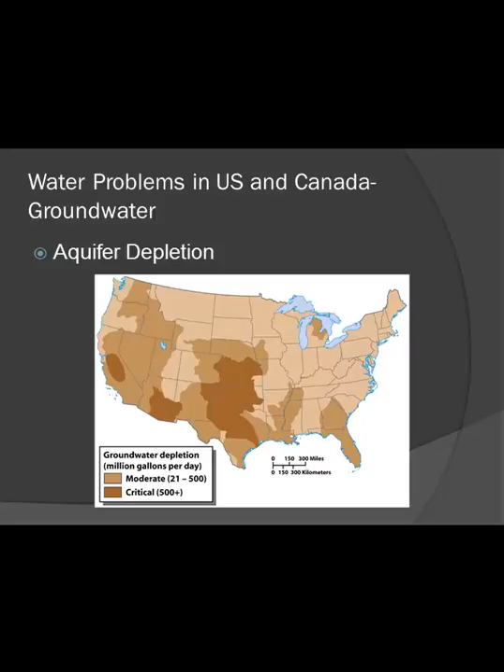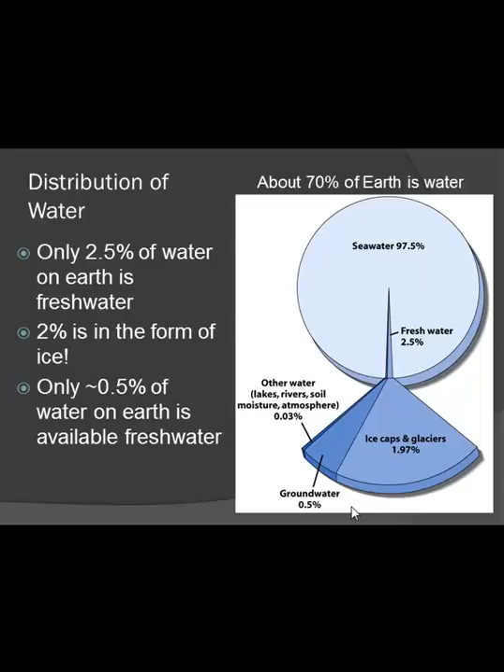We have to be careful in how we use our water. So there is enough water, as this first bullet shows, but it's not evenly distributed, and we don't manage the runoff of our water carefully enough to preserve it or conserve it.

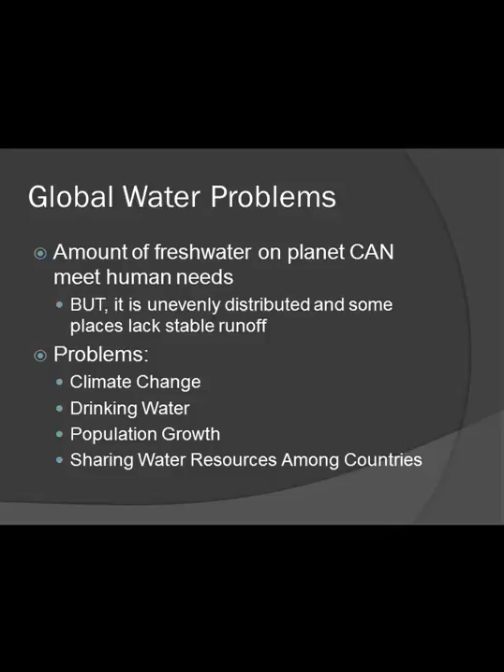Some of the major problems that have to do with why we have freshwater problems are climate change. Drinking water is a problem that we have to limit the contamination of, population growth, and being friendly with each other in sharing our water, not just among countries, but also from state to state.

You do need to understand that climate change is impacting the amount of water available for us, the amount of fresh water available to us, and the amount of fresh water that is not contaminated. So some of the issues are with climate change.

If you're ever asked, how does climate change impact water and water availability for human use? Well, you could say that climate change can actually reduce the amount of snowfall. If we have less snowfall, we have less runoff going into our streams, so we have less stream water - that's our surface water that we still use for drinking in many places.

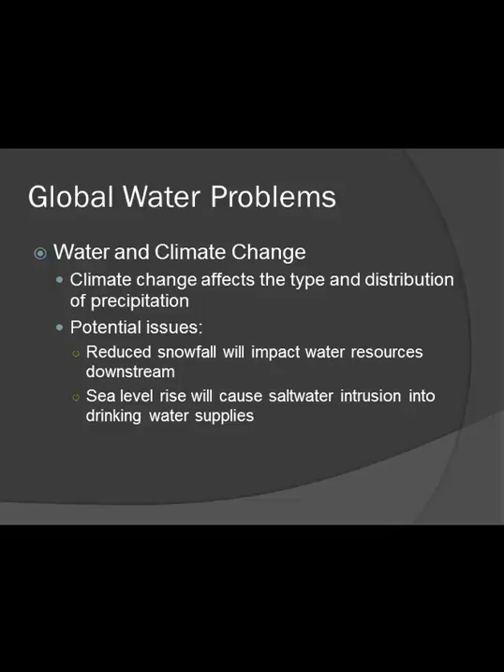Also, as a result of climate change, the sea level could rise. If we have more sea water, that's more salt water, that's more pressure, and more of a potential saltwater intrusion for all the groundwater supplies along coastlines.

Other drinking water problems that seriously need to be considered is that developing countries do not have safe drinking water, or they don't have access to water and they have to travel very far just to get it. And when they do, it's not much and it's contaminated to the point where it can make them very sick and kill them. Many thousands of people a year die from drinking water contamination.

Also, our population is growing worldwide and especially growing in developing countries. And this increased population means that they need more safe, fresh water.

We also use, as you know from the last slideshow, a ton of our water for agriculture. We need to think about how we're using water for agriculture and practice more sustainable agricultural methods.

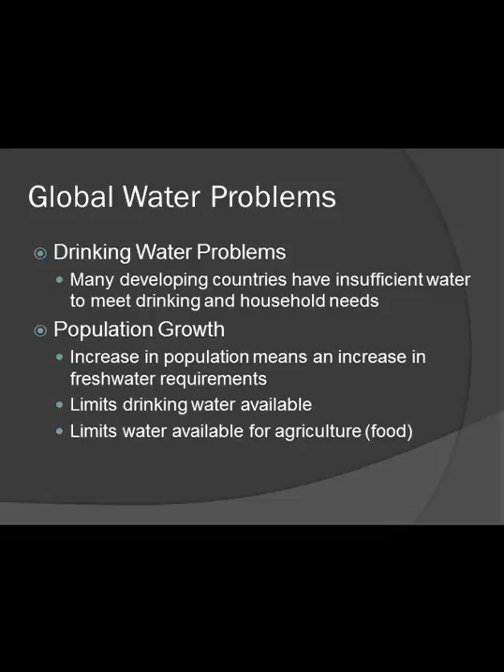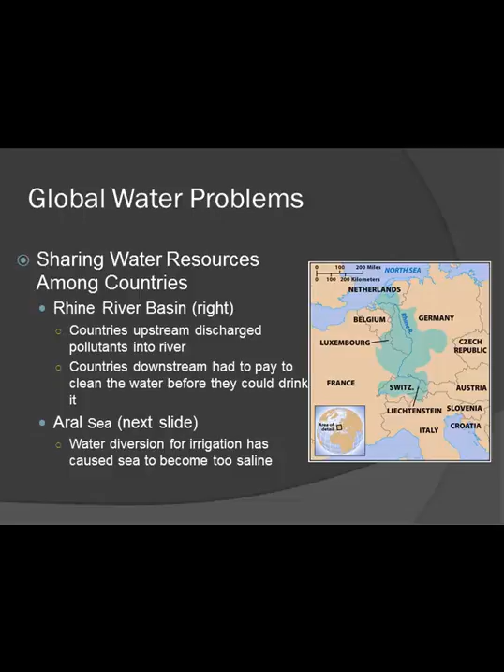Other examples of countries that just irritate each other because of their shared water are around the Aral Sea, and we'll look at that on the next slide. That's because they have diverted the water for irrigation, and it's caused the sea to become salty, as we'll see in a couple slides.

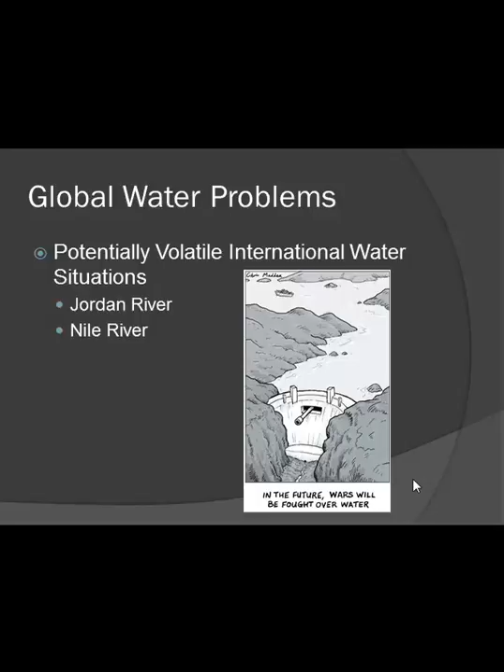We also have water wars just because we're building dams. By building dams, whoever's downstream of what was once a big flowing river is now impacted by less water downstream. So when we think about what we can do to conserve our water, we also need to think about not just conservation, but management of the water that we do have.

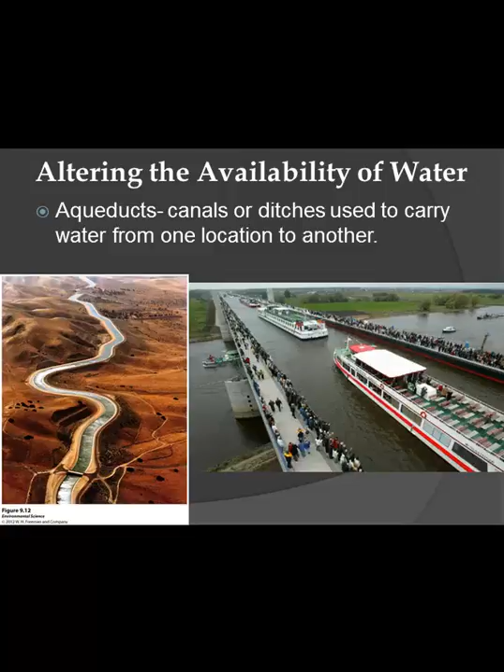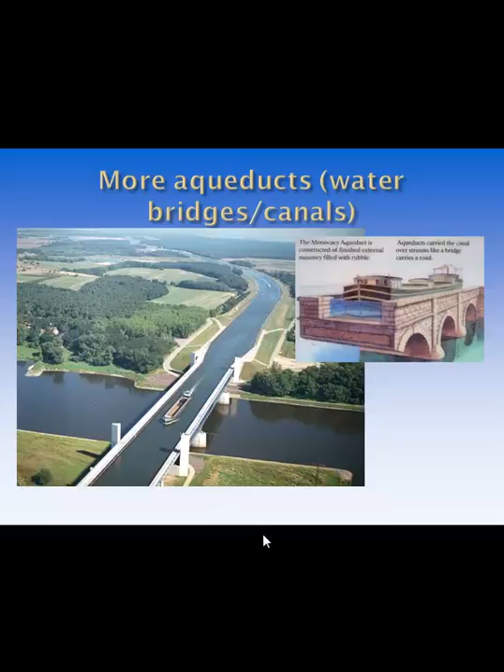Sometimes our aqueducts are also used for transportation. Not only do they transport water, but they also carry cargo, or in that case, just ships. This is just another example of an aqueduct - it looks like a road, and it just looks like, oh, isn't that a nice little river? But it's been constructed in order to bring fresh water from one location to another. These have been used for a very, very long time.

You also need to know what a dike is. It's very similar to a levee - kind of like a wall that holds back water from pouring in from a larger body of water. Dikes are built to prevent ocean waters from flooding into adjacent land.

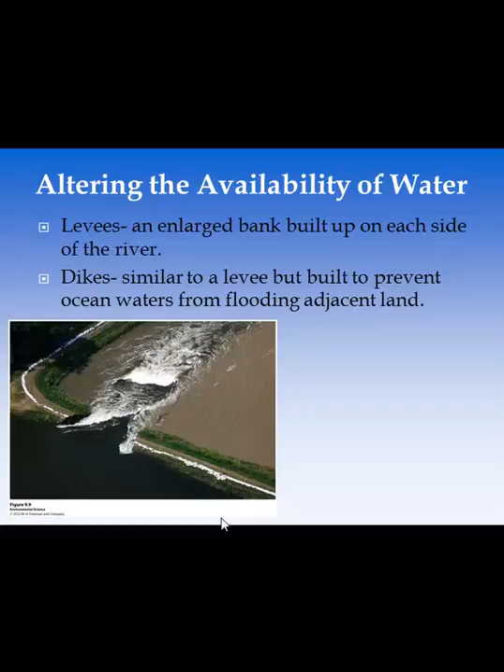What you're looking at here is California. California receives a lot of its water from diverting water from other locations. If you look at the picture and see what's in blue, you'll see lakes labeled in blue, as well as aqueducts, which are the transportation lines for the water to go from one large water location, such as a river or lake, to a place that's more highly populated.

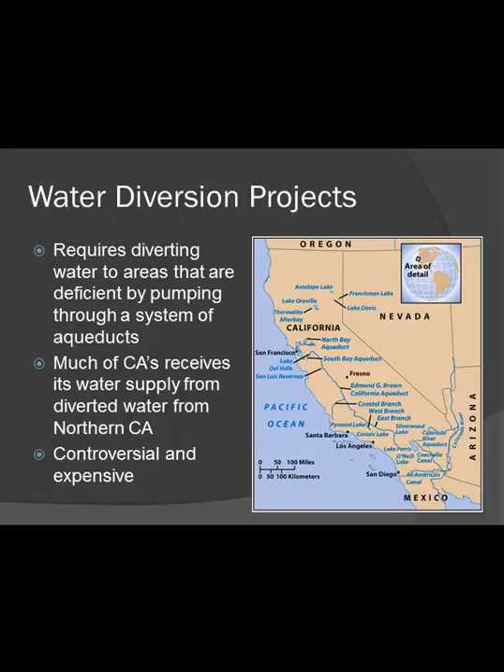These are really controversial, because moving water from one location to another and diverting it the way you see fit impacts the other people who lived along that waterway and used it naturally before it was diverted. This creates something we call water wars. And it's really expensive, by the way, to divert water. Okay, back to the Aral Sea.

The Aral Sea at one point was the world's 4th largest freshwater lake. Let's go back and take a look at what this picture is trying to show us. This is a consequence of water diversion, which can have devastating impacts downstream, as I told you before in the other pictures.

The Aral Sea borders a couple of different countries, and as the world's 4th largest lake, it was a great resource for many people for fresh water. Since the two rivers that fed the lake were diverted to go to bigger cities, the lake's surface area was dramatically affected.

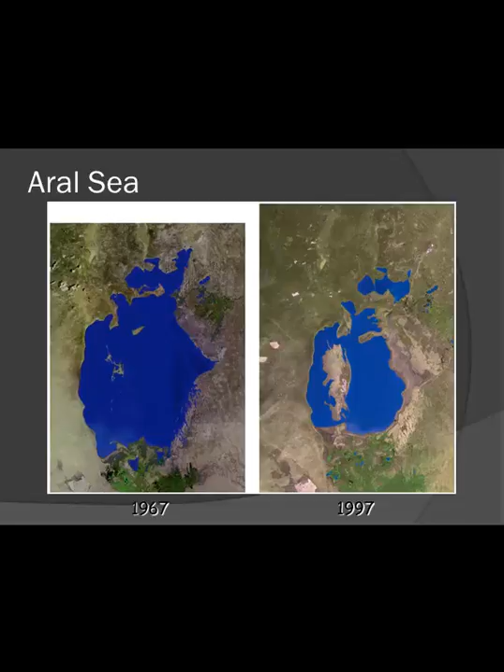The surface area declined by 60%. You can tell by looking at the pictures how much less surface area there is. The lake has become split into two parts now - the North and South Aral Sea.

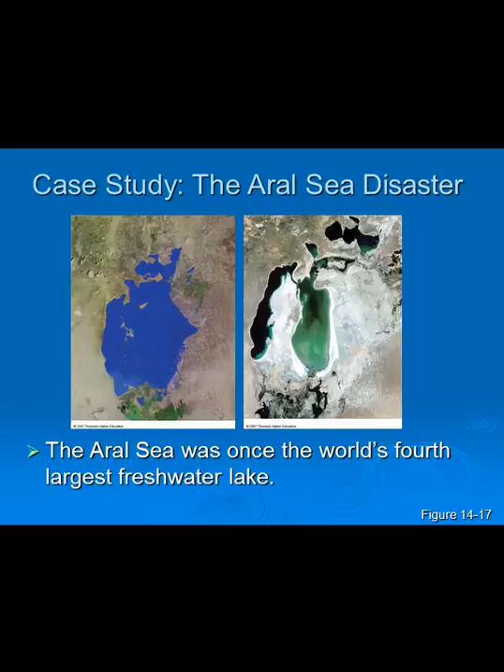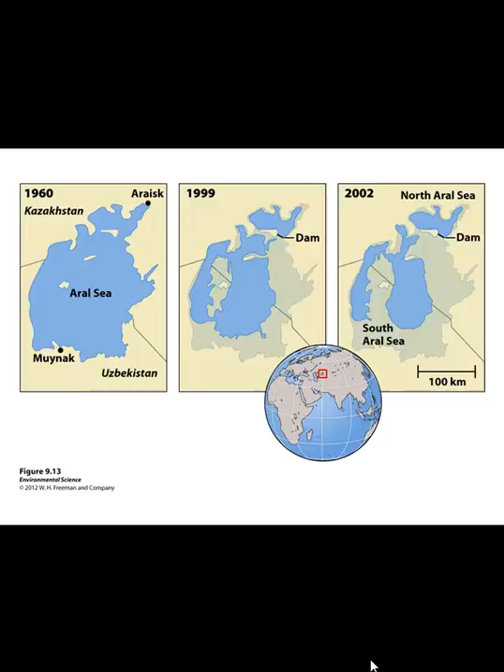Here's another picture showing that change in the surface area of the lake, and now you see our two seas. Here it is with some nice labels for you to understand how much surface area we lost because people were getting greedy by diverting the water and abusing the amount of water they used.

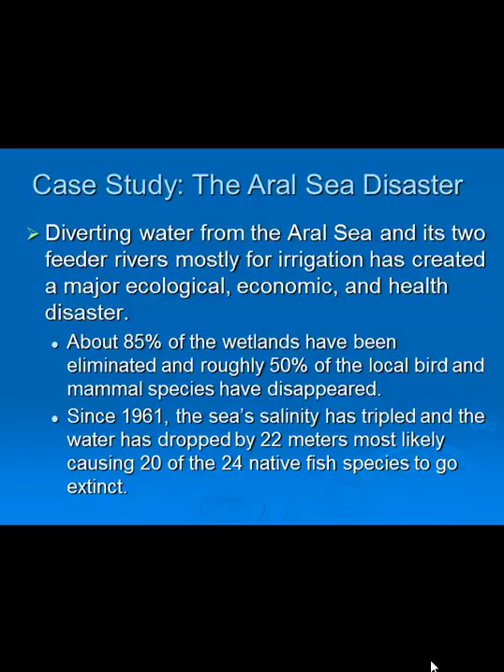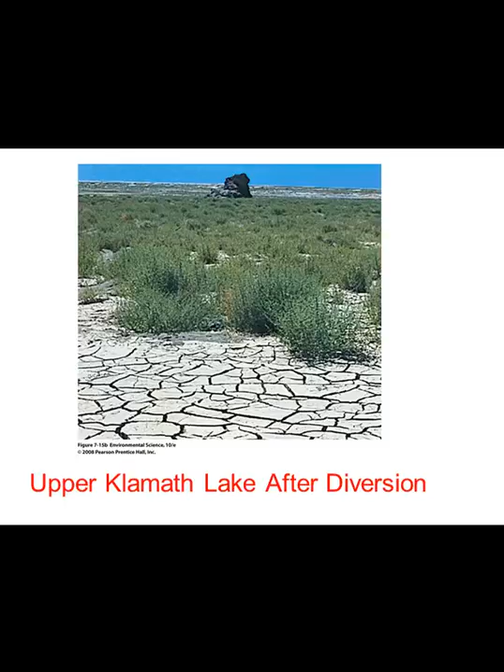So we know about some of the issues with water diversion. What are the other things that we do to alter our water resources? We build dams and we make reservoirs.

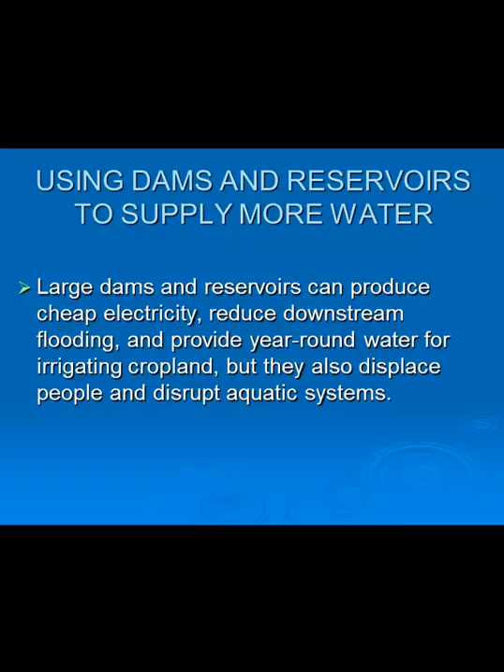We build dams because we need them - for electricity, to reduce flooding downstream somewhere, and for agriculture, irrigation, and for supplying drinking water to us. We disrupt these systems that were once natural.

In the United States, we have well over 80,000 hydroelectric dams. You guys are most familiar with a really common one around here, and that's the Conowingo Dam. It's on the Susquehanna River, and that is our hydroelectric dam. Many of these dams are not really safe to use anymore, and they've been recommended to be decommissioned.

Some of the benefits of a dam are to generate electricity. The water behind the dam can be used as a reservoir for recreational activities like boating, fishing, and swimming, and this is common behind dams. This also regulates how much water is flowing downstream, especially in the spring when the snow melts everywhere.

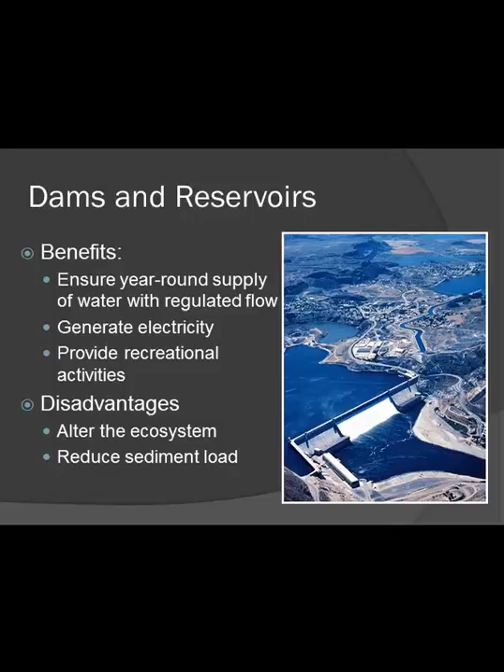But there are definitely disadvantages to ecosystems. The fish can't swim all the way upstream. We don't have as much sediment that carries the nutrients where it belongs, so we have a reduction in our sediment load. So we have benefits and we have disadvantages.

The reservoir will be behind the dam - that's what's holding the water. We'll learn later about what a dam looks like in detail for hydroelectric power use really soon.

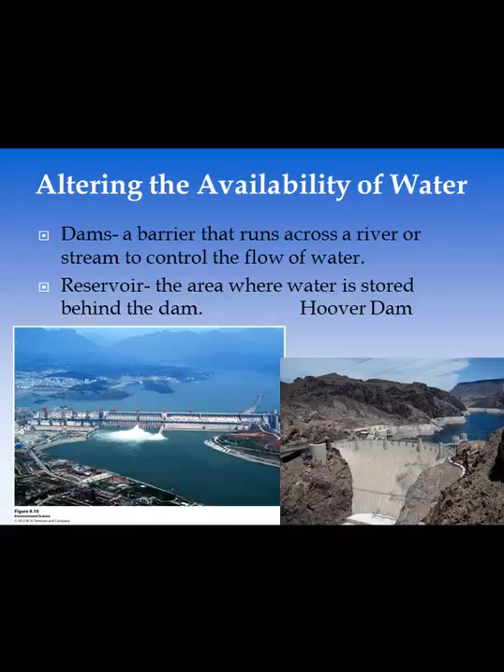This is a picture of the Glen Canyon Dam, also along the Colorado River. I actually visited here - it was really cool, very tight security. I took a group of kids from the SMA, and if you look at the road that goes in front of the dam, we were on the side where the water was released, and we took a boat tour. That was kind of crazy, looking at this huge giant wall behind us that was holding all that water in the reservoir.

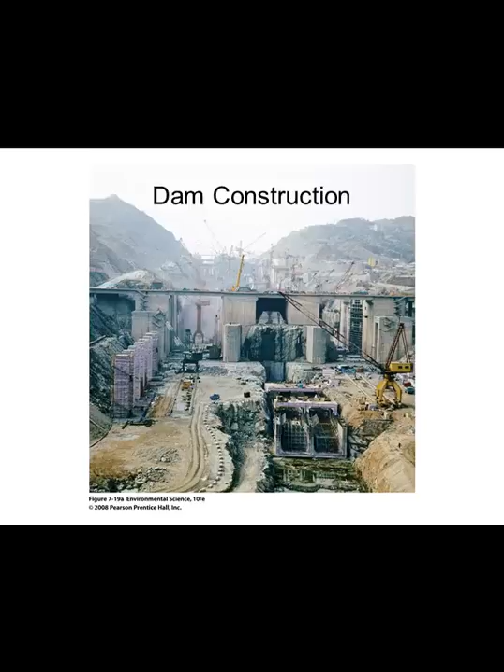Again, the Three Gorges Dam - this is in China, very famous, very new, very controversial.

So what disrupts the integrity of the river system? We have flooding that happens above the dam, in the reservoir area. We have too much sediment that builds up behind the dam, and we don't get that floodplain where lots of floodwaters build up and then recede, just like from rainfall and such.

Below the dam, that was the part where I took my little boat tour, think of that. We don't have our natural river flow patterns anymore, so now it's pretty much going in the one direction dictated by the dam release. We don't get all that vegetation, the diversity, nor the richness that's important for the rest of the ecosystem. And we don't get that floodplain, which is really important because it brings nutrients to more than just the banks.

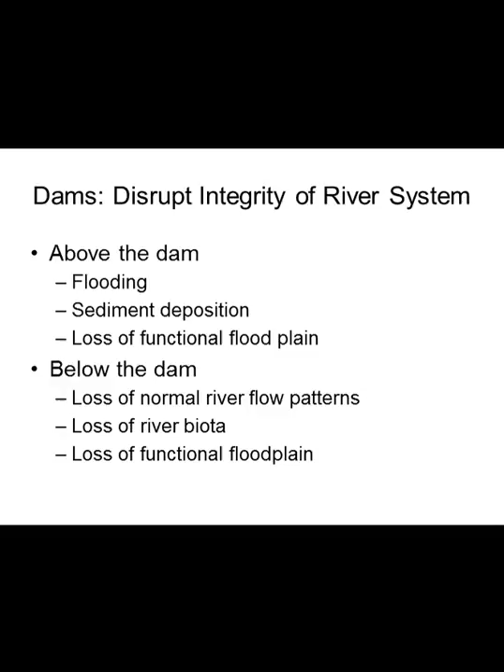Now, because we have learned how much it has killed the biodiversity by building dams downstream, we now regulate the flow, and we actually purposely flood the canyons where dams are in order to bring back that sediment deposit and the nutrient deposit that comes along with it. We've noticed from doing a couple of these planned floods that the ecosystem does tend to build a little better than it was before we started doing that flooding.

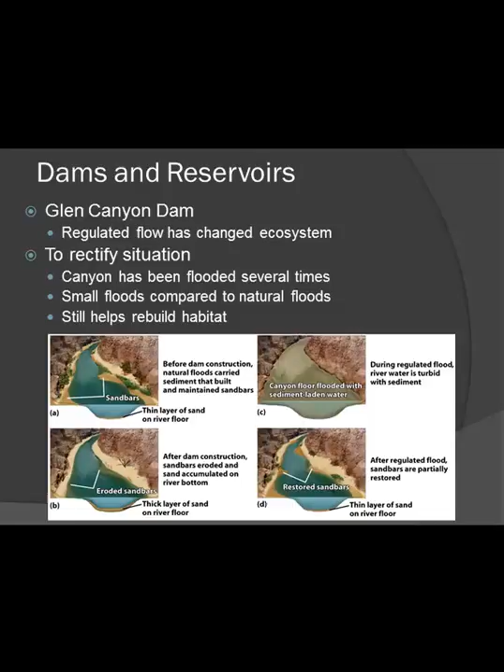And C shows you floods, so the waters are now going past the banks. This is important because the waters also carry sediment and nutrients in them. And now we're restored back to our sandbars, and we've dropped off some nutrients beyond the banks. That's important for building species richness, getting more of that biotic material in there as well.

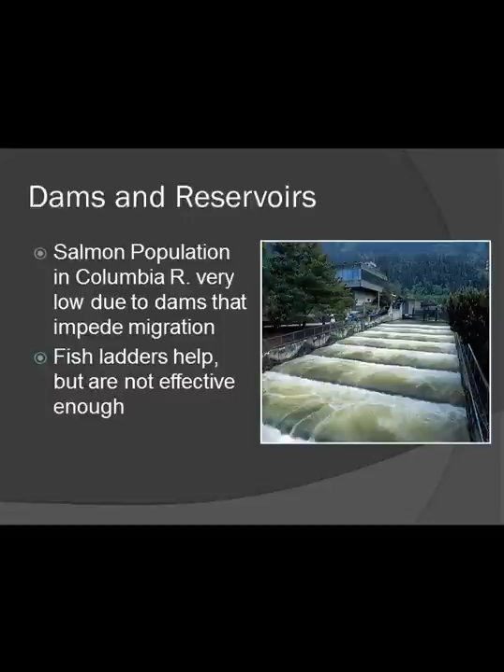Let me go back. They started building fish ladders along all these dams, and the fish ladders were supposed to encourage the movement of the salmon and other fish that have to migrate all the way upstream for their yearly spawning. So we built fish ladders on the Conowingo as well—you're familiar with the Susquehanna River and the Conowingo. To the right is what our fish ladder looks like, and this is to help with the migration of the Great American Shad, which is the name of a fish. But this is our fish that we needed to save in the Susquehanna.

If you take a look at the map to the left, look where the Susquehanna River is. I'm going to help you a little. All the way down at the bottom is the Chesapeake Bay, and then if you look carefully, right on that Maryland line is the Conowingo Dam. That's the one that you're most familiar with—that is our hydroelectric dam. Notice that we have three other dams that are upriver from the Conowingo. So all the impacts of dams environmentally are occurring multiple times along the Susquehanna River. The Conowingo is the last of them before it releases into the Susquehanna and then directly into the bay.

If you want to, you can go on YouTube and look up a video on the Conowingo fish lift, and you can actually see it fully animated showing how it works.

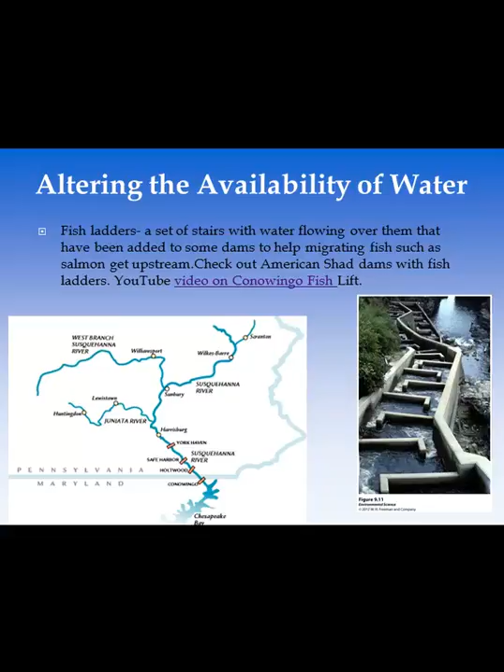Okay, now we're going to look at what's actually going on inside a dam. We will do this another time, but this is just a quick introduction.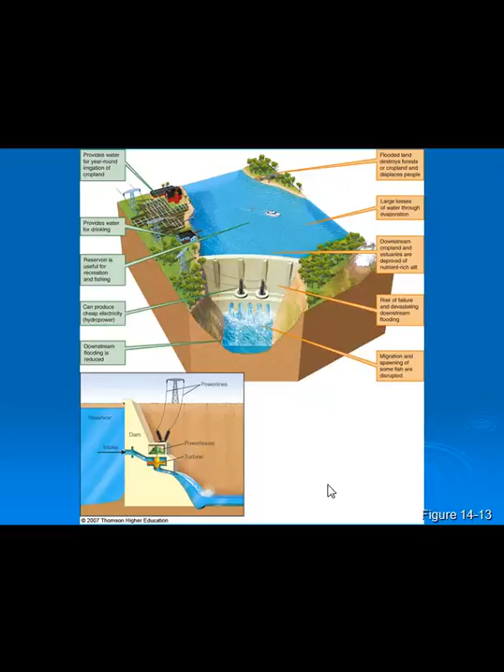Now if you look at the bottom picture, that shows you the turbine right in the middle of the picture. It shows how water flows from the reservoir through the dam, turning the turbine and providing power, which we'll learn in more detail. Then the water is just released downstream. That's how a dam works. You can pause this and read it again on your own if you need to.

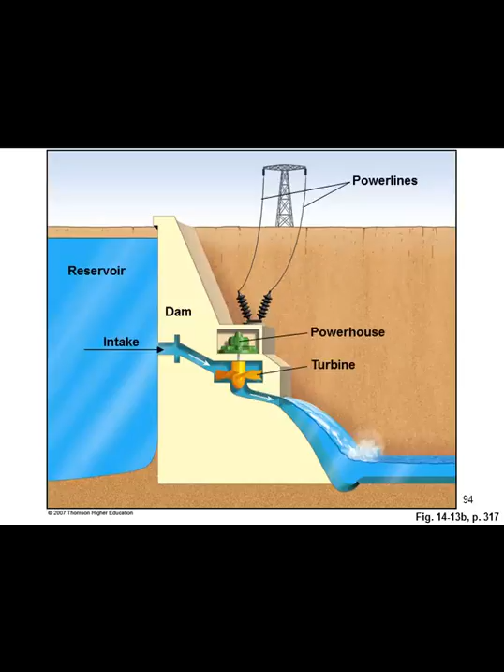Okay, so the Three Gorges Dam is the really big one I told you about. Let me jump ahead. It's in China on the Yangtze, which goes into the Yellow Sea. This is the newest and the world's largest dam right now. Just follow it along, and I'm going to go back to that last slide so you have a better idea of the Three Gorges Dam.

It's a huge debate, and as a dam, its reservoir is really problematic. It's now officially 2 kilometers long. It's going to provide enough electricity that 18 large coal-burning or nuclear power plants do not need to be constructed.

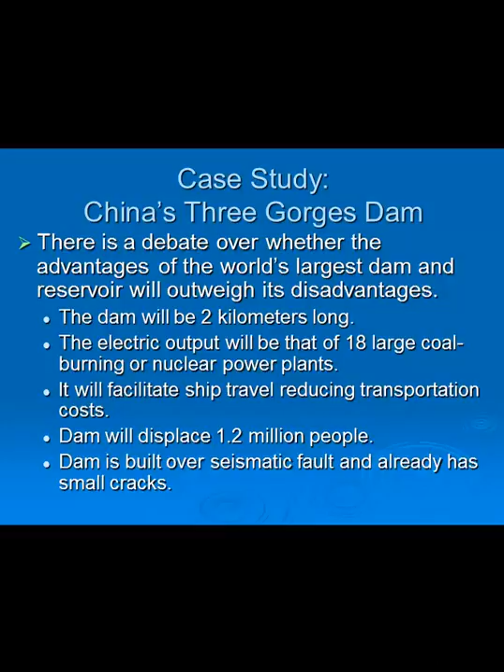It facilitates ship travel, with locks that help ships pass through. But over 1 million people had to move as a result of the dam's construction—that's a change in community and society. And it's built over a fault line, so it already has small cracks and is a potential earthquake disaster. But it provides hydroelectric power instead of 18 coal-burning and nuclear power plants.

To remove a dam is a whole other story, and the Three Gorges Dam is not going to be removed anytime soon. But there is dam removal happening—500 dams in our country alone have been approved for removal by the Federal Energy Regulatory Commission. It costs a lot of money to remove them too.

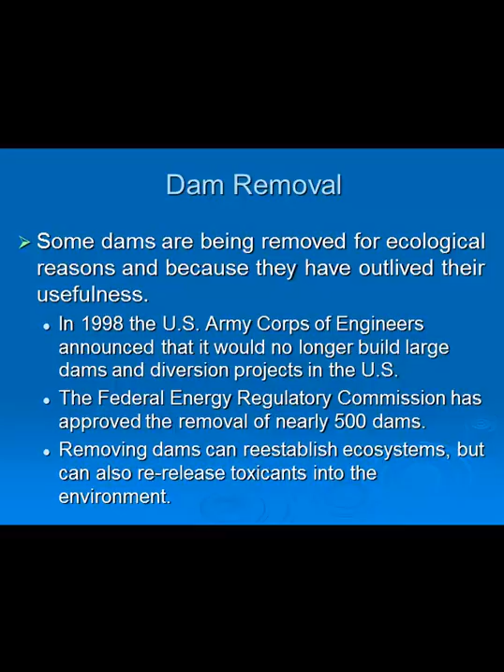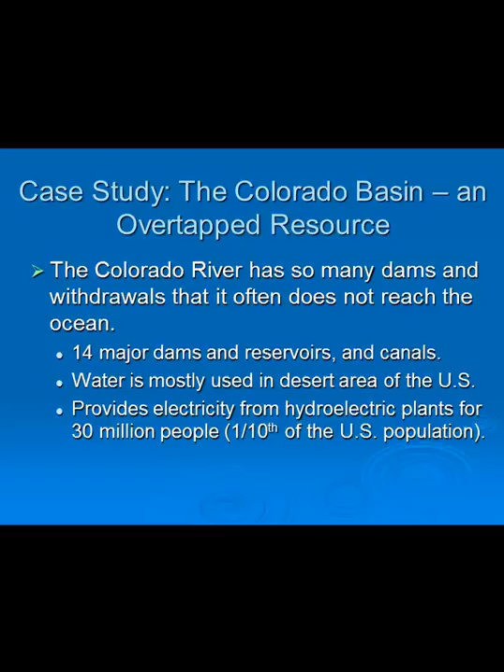Okay, so the Colorado River Basin is what I'm going to show you a picture of in a minute. It has many dams and withdrawals, and remember, we divert water from the Colorado, which is creating wars among communities downstream versus upstream. But it's providing a ton of electricity through hydroelectric power.

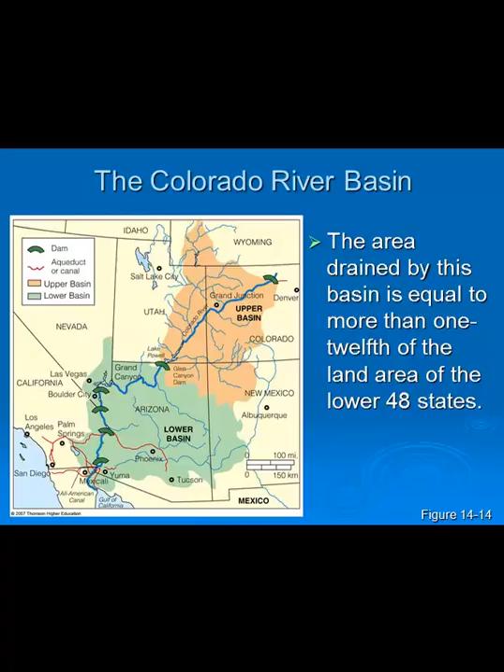So this is just one picture leaving Lake Powell. And this is another map showing, in green, all the dams along the Colorado River. Notice how many different communities are impacted by the water upstream—the first dam affects everything downstream, and the second dam affects everything downstream from it. All the people who used to live along this river have been negatively and positively impacted because of the construction of all these dams. So there are pros and cons.

Now this system lies in an almost all desert area, and it has a little rain shadow effect as well. Remember the rain shadow effect: we're not getting rain over the mountains once the clouds drop, and that's from the California mountain ranges.

All this water provides water and electricity for more than 30 million people. And as you notice, this is 7 states that we're covering, 7 different states sharing this water.

The river's water is used to produce about 15% of the nation's crops and livestock. That's our crops, our livestock, what we eat.

It also supports a multi-billion-dollar recreational industry because everybody goes there for whitewater rafting, for boating, for fishing, for camping, for hiking. That's a lot of money economically.

The river supplies water to some of the nation's driest and hottest cities that you're most familiar with. So you take away this river, and Las Vegas, Nevada is going to be mostly uninhabited, it'll be desert. San Diego, Los Angeles, California, they can't support their present populations without this water getting diverted to them. In California's Imperial Valley, which grows a major portion of all the nation's vegetables, it would consist almost all of cactus and just plants that are not edible.

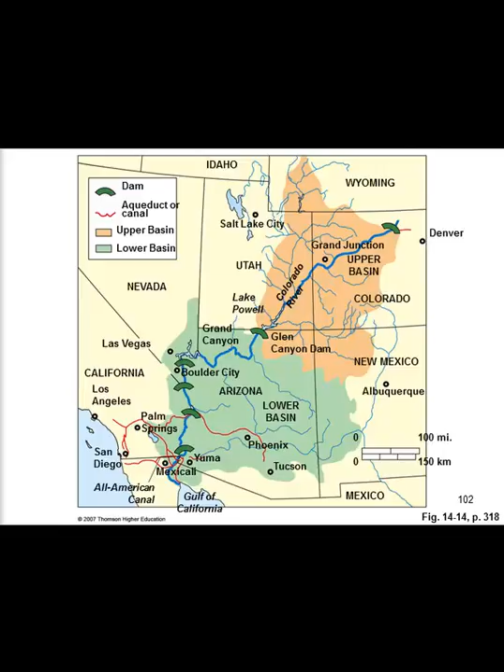So what do we do about it? What would you do about it? How would you vote? Do the advantages of large dams outweigh their disadvantages? You have an A and a B response. Which would you pick if I did this on a clicker? And there's no yes or no, there's no really right answer for this. It's just, well, where do you stand?

So some researchers argue that the 7 states using this Colorado River system should actually enact and enforce really strict water conservation measures. It's recommended that they increase the price that people pay for water from the river. They also suggest that some measures be put into place to slow the population growth in those areas, and that urban development stops and agriculture stops or gets moved, and we shift agriculture to crops that don't need as much water. And people living in or moving to areas served by that river have to realize that they're actually living in a desert, and they must adapt to the natural desert environment. What do you think of those strategies?

So we manage our water and impact our water supply by building dams and reservoirs. Other things that we do include desalinization and desalting seawater. We also seed clouds, and we remove salt. So distillation and reverse osmosis are the methods.

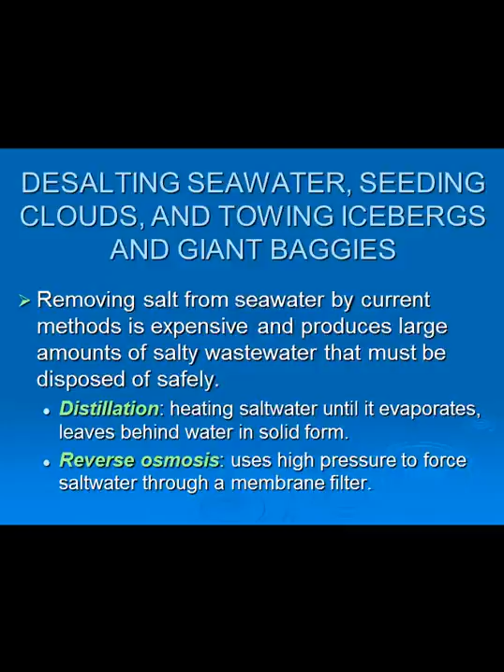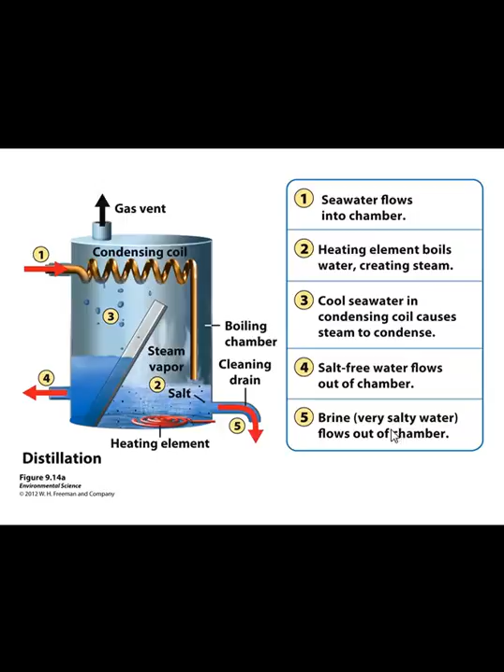It could almost be served at dinner. So that's the distillation process. Then we have the reverse osmosis process. These are both very expensive, by the way.

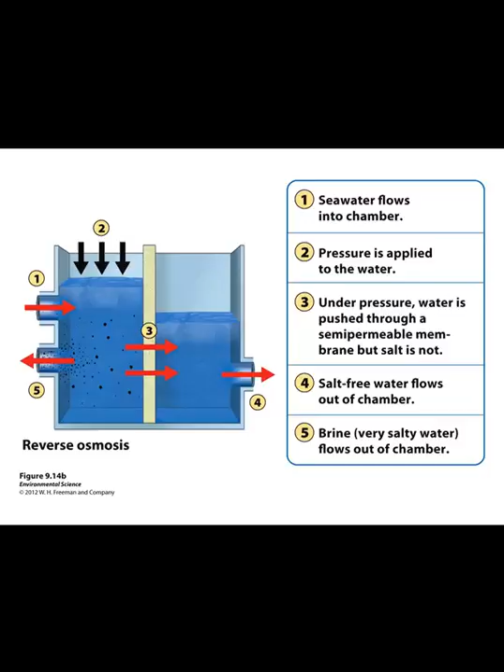So desalinization, or desalination, involves removing dissolved salts from ocean water or from lake water that has salt in it, or brackish water that could be in an estuary, or that's found in an aquifer. It's another way to increase supplies of fresh water to us.

According to a report by the U.S. National Academy of Sciences, about 15,000 desalinization plants operate in more than 125 countries. This is mostly in arid nations, with many in the Middle East, North Africa, Caribbean, and the Mediterranean. They meet less than 0.3% of the world's demand for fresh water.

So, some major problems with the widespread use of desalination: it's one of the highest and most expensive energy footprints. It takes a lot of energy to desalinate water, with distillation requiring about 10 times as much energy as reverse osmosis.

The second problem is that pumping large volumes of seawater through the pipes and using chemicals to sterilize the water and keep down algae growth kills many of the marine organisms.

The third problem is that desalination produces large quantities of briny wastewater containing lots of salt and other minerals. Dumping this concentrated brine into nearby ocean waters increases the salinity of the ocean water, and that's what they're doing, threatening food resources and aquatic life in the vicinity. Disposing of it on land could contaminate groundwater and surface water as well.

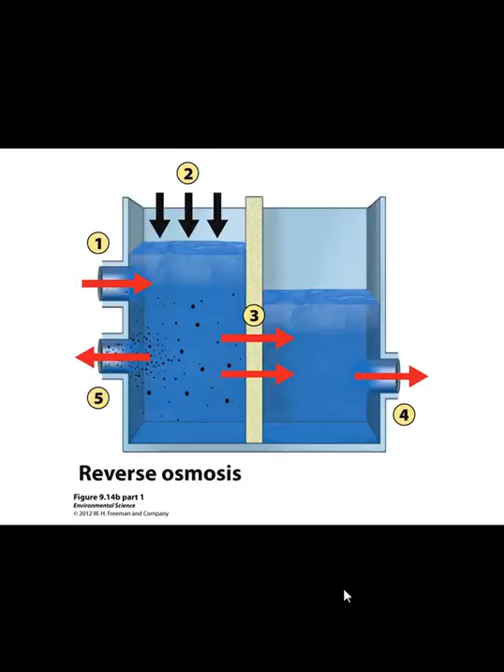Pros, cons, what do you do? The bottom line is that currently significant desalinization is practical only for water-short and wealthy countries and cities that can afford its very high cost. But scientists and engineers are working to develop better and more affordable desalination technologies. You could be the one to help do that. Make it better.

Alright, so we're going to shift a little to water availability per capita. This is per capita per year in cubic meters, that's how the chart is reported. The amount of water available per person varies a lot around the world.

If you look carefully, look where the United States is. We're using a whole lot of water. North Africa, look at the Middle East, these are regions with the lowest amounts of available fresh water. So we have a lot of water, and that's why we use it. But they don't have a lot of water available.

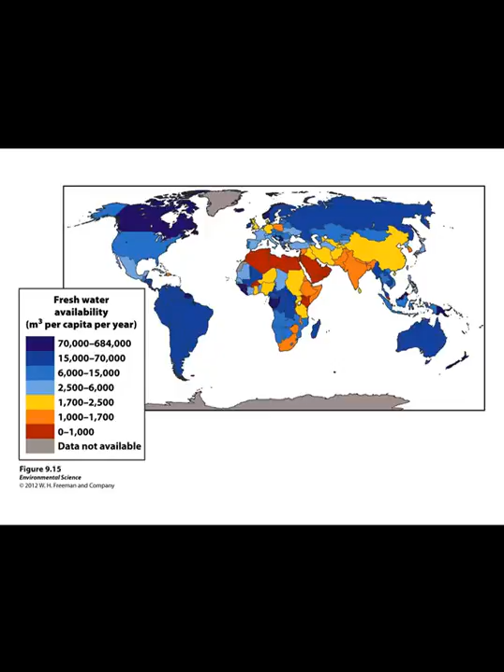If you take a look at how much we're actually using per day, the United States is the king of bad, the king of not being conservative and not living sustainably with our water use. Take a look at everybody else's water use. Any surprises here? Anything you're interested in? You should know the top 4 water users. That's per capita, on average per person. Don't even worry about how many people live in this country versus that, it's just per capita.

Now what you need to understand about this is we're figuring in all the water that's used in agriculture for the vegetables you eat and the fruit you eat, and all the water used in industry, plus the water that comes out of your sink. So this is not just based on what you're pouring out of your sink and how long your showers are. It's also based on how many TVs and cars you buy, how many carpets you buy, because that has a lot to do with industrial use of water to supply you and meet your needs.

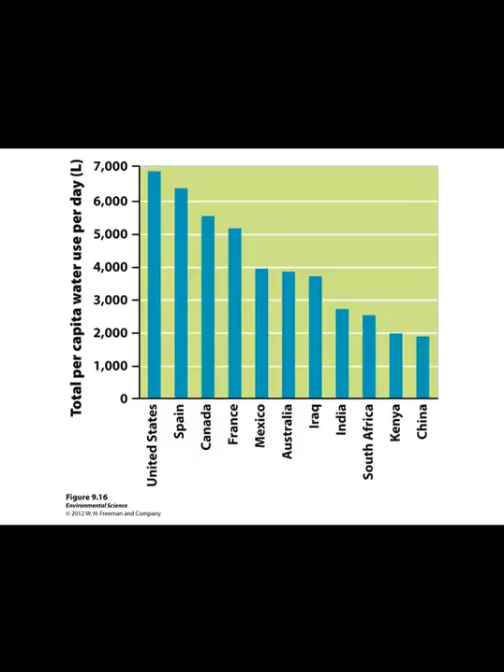Okay, so just a review. We're using all this water from the ground and we're using too much of it. What are the consequences of using too much of that water again? Do you remember what they are?

Hopefully you're thinking, okay, well, the water table is dropping. We have less water in there if the water table drops. How about we have less surface waters in our very important wetlands that filter? We have more land subsidence, think sinkholes. And we have more saltwater intrusion. So these are just some of the consequences of us using our groundwater faster than it gets replenished.

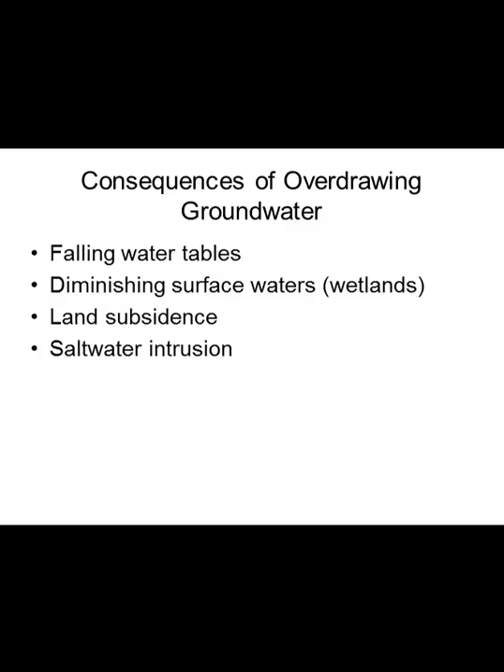So what are some of the methods that we use that also withdraw too much of the groundwater? So we've been talking about surface water. Now let's focus a little on groundwater. So as you hopefully recall, over 70% of the world's fresh water is used for agriculture.

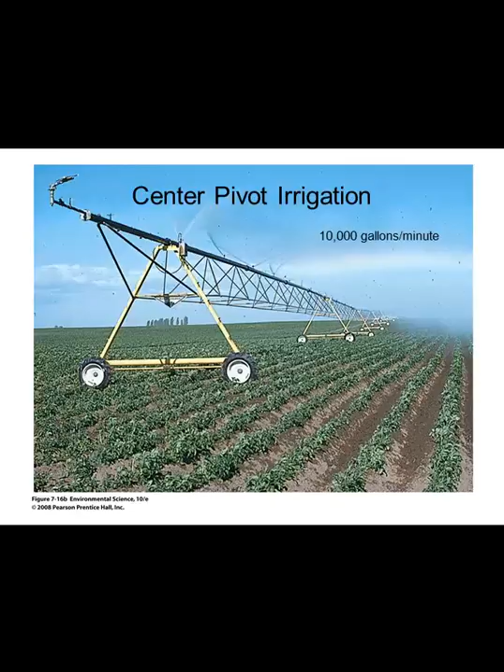So I think we need to spend a little time just going over agriculture and agriculture water use and water withdrawal. This is one of the ways that we irrigate or plant our crops, and I'm sure you've seen these around Harford County. This is a type of method that we call center pivot irrigation, and our crop is actually going to be on a center plot. So the center pivot is going to be moving along.

Since agriculture is the greatest consumer of fresh water through the world, agriculture presents the greatest potential for conserving water by changing agricultural purposes and practices.

There's 4 major techniques for irrigating crops. So we have furrow irrigation, that's the trench, and it's filled with flooded water. Then we have flood irrigation, the entire field is flooded, entire field totally flooded. And then we have spray irrigation.

That uses an apparatus that sprays water across a field. Then we have drip irrigation that uses a slow dripping hose that's laid on or buried beneath the soil. And then we have hydroponic agriculture, and that's where crops are grown in fertilized water, and we actually don't use any soil.

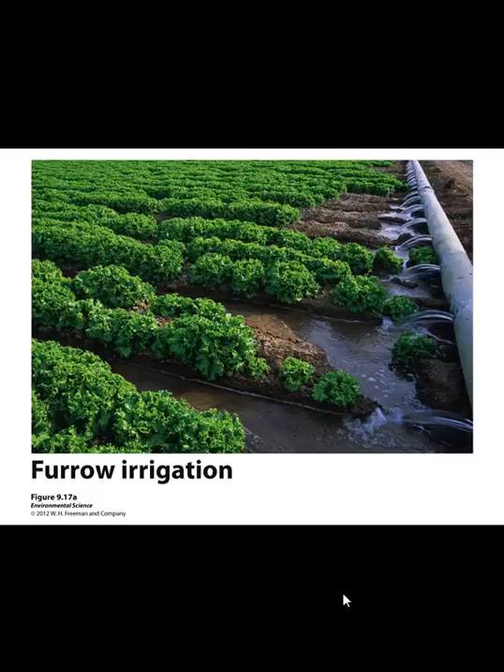So looking back on this, furrow irrigation, the trench with flooded water, it's actually 65% efficient. That means that 65% of the water is accessible to the plants and the roots, and the other 35% runs off the field or evaporates. It's wasted.

Flood irrigation is actually a little more efficient than furrow. It ranges from 70 to 80% efficiency. And then we get even more efficient with our spray irrigation. It's 75 to 95% efficient, but it costs the farmer much more because we have to use a lot more energy for it. We also have to use a lot more water.

And the best method is actually drip irrigation. It's 95% efficient. It also has the added benefit of reducing weed growth because the surface soil remains dry, so it's not wet on top, and it discourages weed germination. These drip irrigation systems are useful in fields that contain perennial crops like orchard trees, and the hoses don't have to be moved for plowing or anything like that yearly.

And then it's our hydroponics. Hydroponics, that's really a growing agricultural industry. It's getting very popular. We use it for vegetables mostly. We can do it year round because we use it in a greenhouse. And the water not taken up by the plants can be reused. So this method actually uses 95% less water than all the previous traditional and slightly non-traditional irrigation techniques.

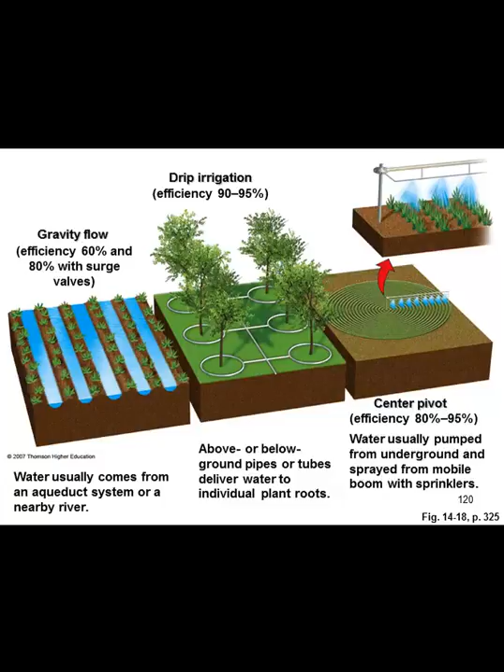So out of our major irrigation systems, because of the high initial costs, center pivot irrigation and drip irrigation are actually not that widely used anymore. And the development of new low-cost drip irrigation systems might actually change how much more of these that we're using. This is just another picture kind of showing you a perspective of what we just discussed from a different source.

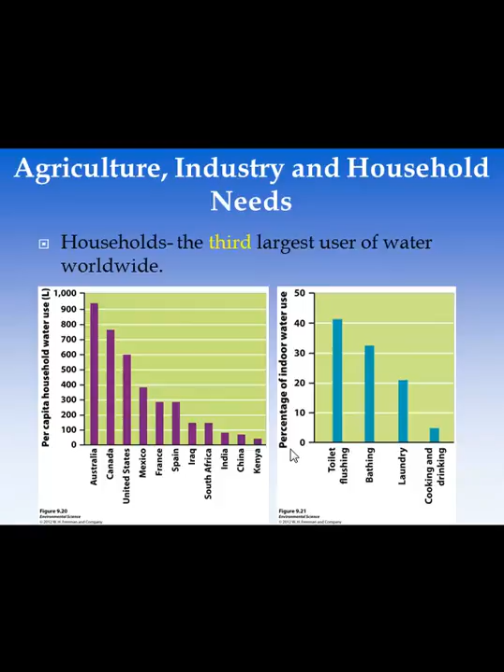We are about done. So, industry is the second largest user of water worldwide. Households are the third largest users of water worldwide. So what do we do about that?